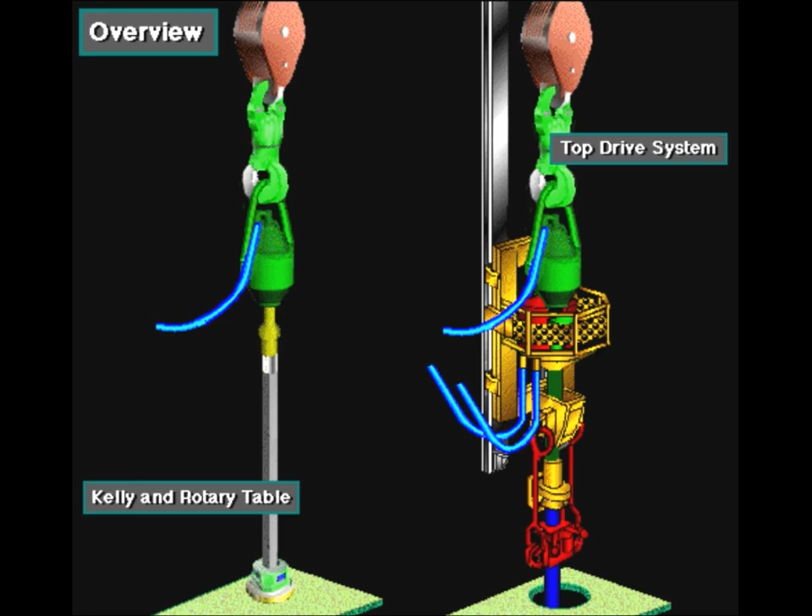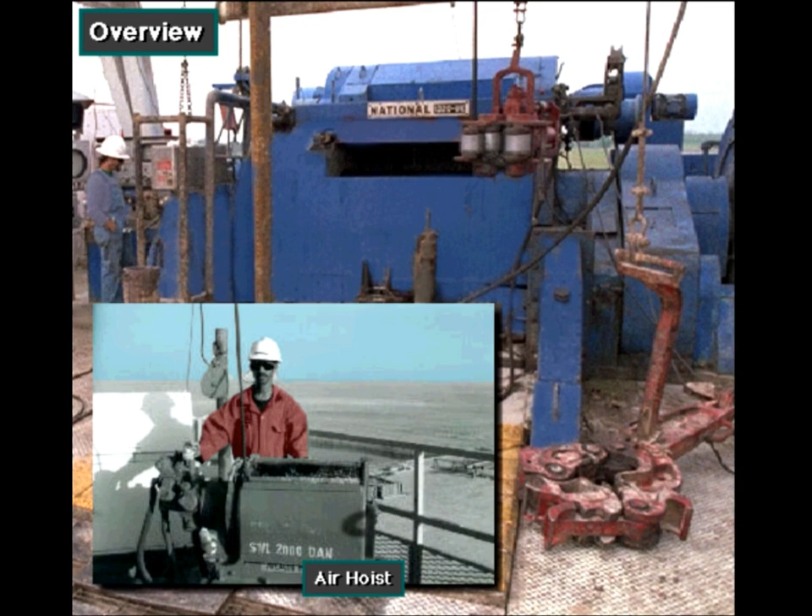Crew members can make connections either by using a Kelly and a rotary table system or a top drive unit. Handling pipe, tripping it in and out of the hole, connecting joints together, and moving it around the rig floor requires a lot of equipment. Included in this equipment are the elevator, slips, tongs, power tongs, spinning wrenches, catheads, Kelly spinner, iron roughneck, rat hole, mouse hole, and air hoist. Much of this equipment is controlled at the driller's console.

Transferring pipe from the deck to the rig floor may also involve special handling equipment. Notice that the Kelly is drilled down. That is, the rig can drill no deeper without adding a joint of pipe.

Here's the sequence to make a connection with a Kelly and rotary table system. The driller picks up the Kelly with the hoisting system, and the floor crew sets the slips to suspend the drill string in the hole.

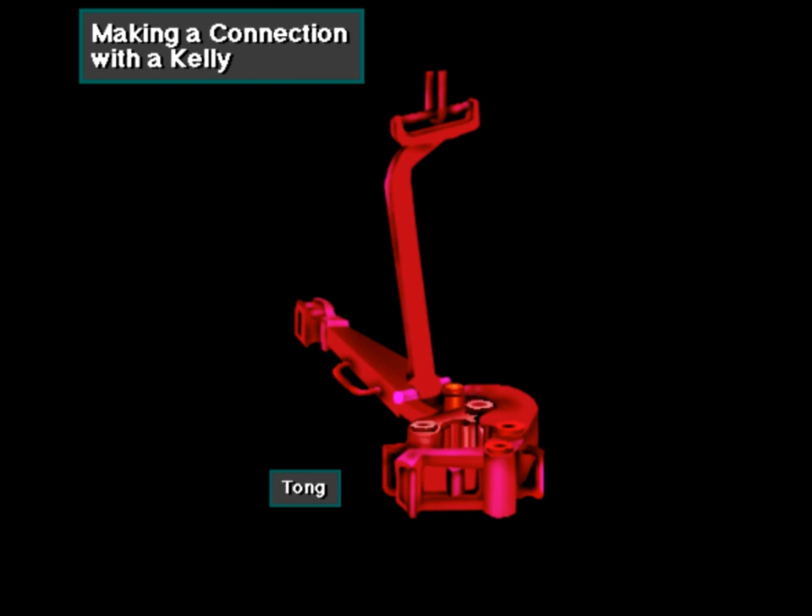Using large wrenches, called tongs, the crew loosens or breaks out the Kelly from the drill string. They latch one set of tongs, called the backup tongs, around the drill pipe to keep the pipe from turning when they apply breakout torque with the second set of tongs, called the lead tongs.

The driller actuates the breakout cathead, which is an automatic winch on the drawworks. The breakout cathead pulls a line attached to the lead tongs and loosens the connection. With the connection loosened, the driller spins out the drill pipe from the Kelly, usually by slowly turning the rotary table. The backup tongs, latched onto the Kelly's saver sub, keep the Kelly from turning as the pipe spins out.

The crew then moves the Kelly over to the new joint of pipe placed in the mouse hole, a lined opening in the rig floor that holds the joint to be added. They stab the Kelly into the new joint.

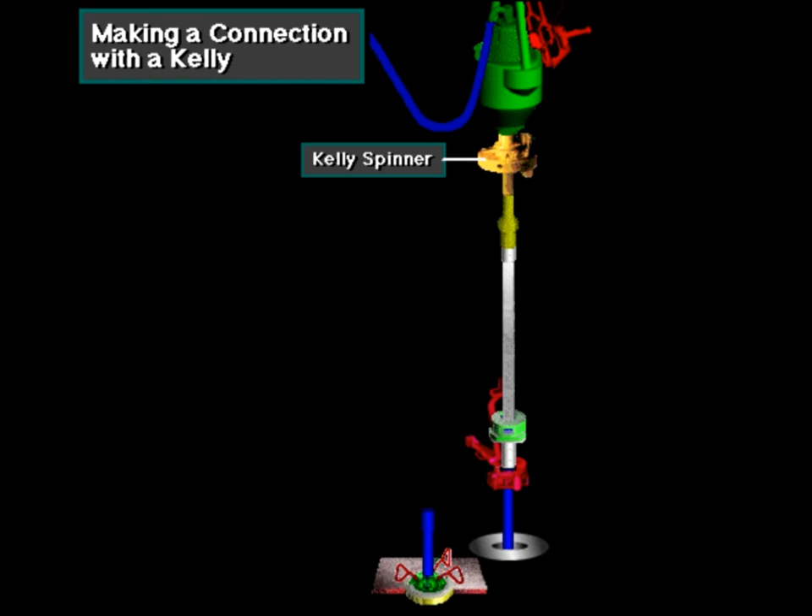They latch the backup tongs around the tool joint of the pipe joint in the mouse hole. The backup tongs keep the joint from turning as the driller spins up the Kelly into the joint using the Kelly spinner. The Kelly spinner is a pneumatic or hydraulic device mounted near the top of the Kelly.

To make up the Kelly onto the drill pipe to final tightness, the crew latches the lead tongs around the Kelly while holding the backup tongs on the pipe's tool joint box. The driller then actuates the makeup cathead on the drawworks.

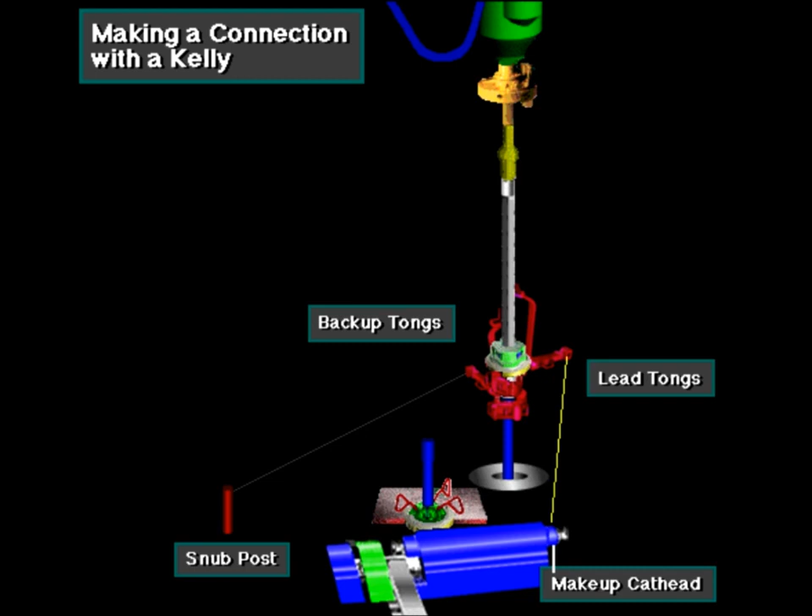The makeup cathead pulls a chain attached to the lead tongs and tightens the Kelly onto the drill pipe joint. The driller, using the hoisting system, picks up the Kelly and new drill pipe joint out of the mouse hole, and the crew guides it to the drill pipe joint hanging in the rotary table.

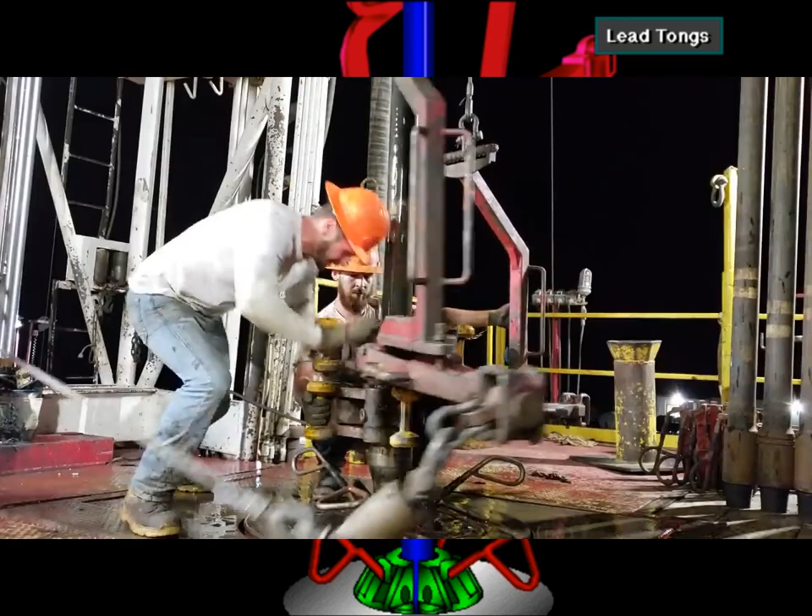The crew stabs the new joint into the suspended joint, and the driller actuates the Kelly spinner to spin up the new joint. Once spun up, the crew latches the backup and lead tongs around the joints to make them up to final tightness. With the joints made up, the driller picks up the Kelly and drill string.

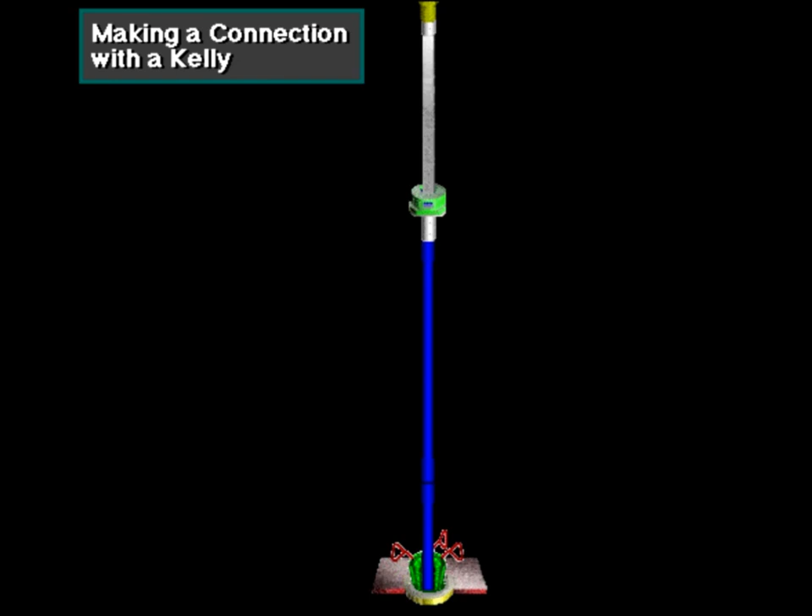The crew pulls the slips, and the driller lowers the Kelly and mates the Kelly drive bushing with the master bushing. Drilling then continues.

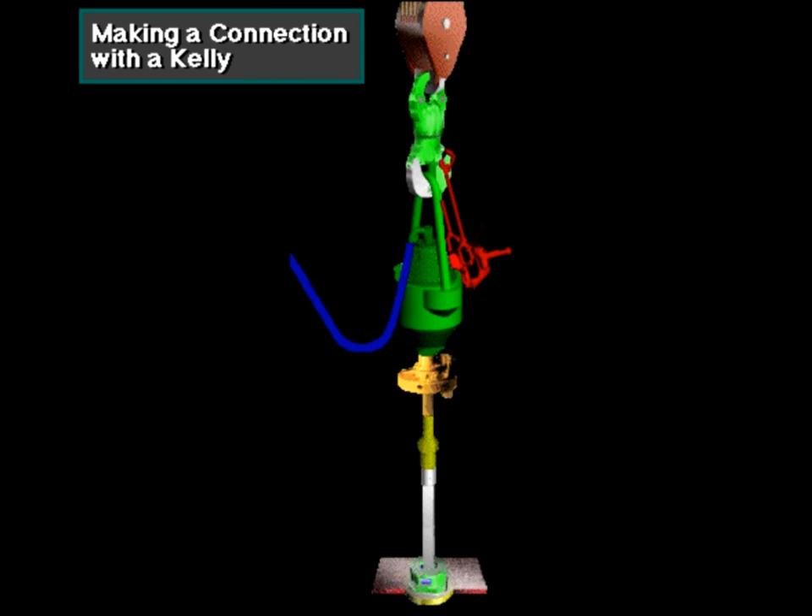Here's how to make a connection using a top drive. After drilling down the stand, the crew sets the slips. The driller stops circulation, and the crew breaks out the saver sub from the drill pipe using the torque wrench in the top drive's pipe handler.

The driller then uses the top drive's drilling motor to unscrew the connection. The driller picks up the top drive, and a crew member opens the drill pipe elevators to allow it to pass over the box of the pipe, setting in the slips.

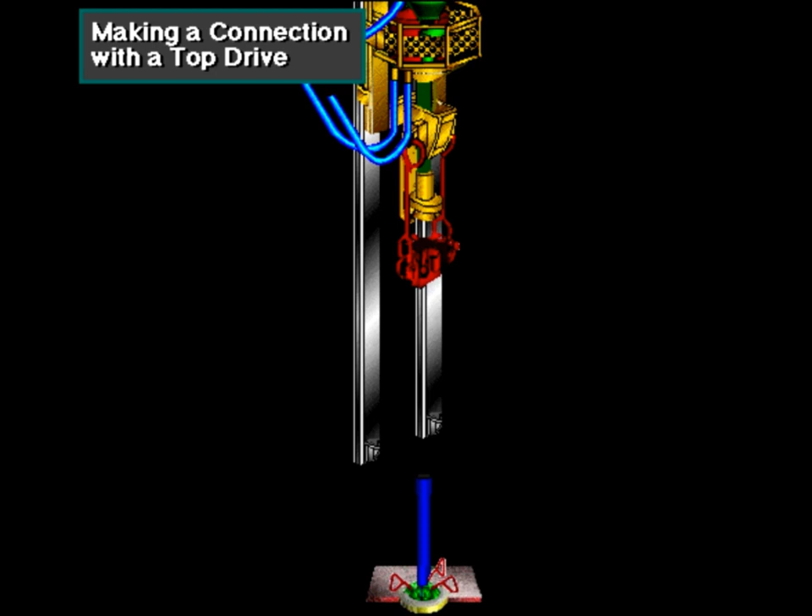The driller raises the top drive assembly to the monkey board.

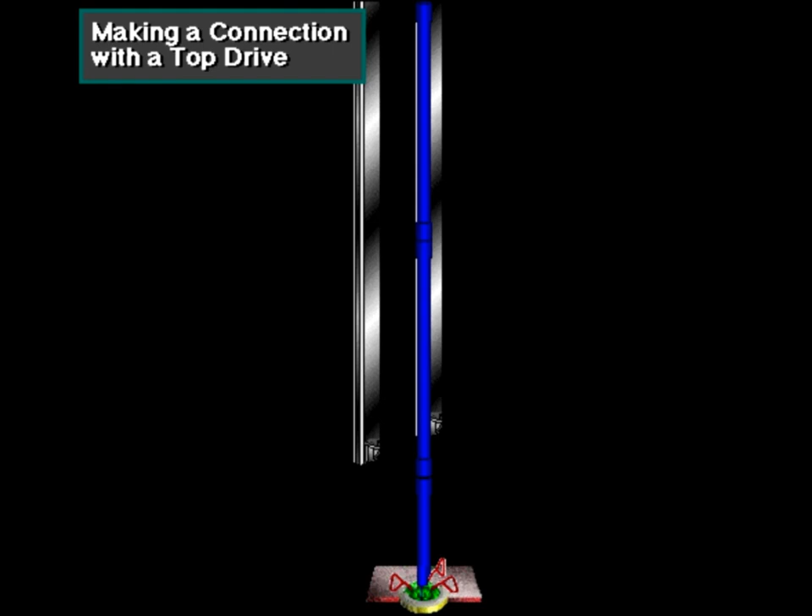The derrick man latches the triple drill pipe stand in the elevators. The elevators pick up the stand, and the floor crew stabs the bottom pin into the drill pipe box in the rotary table. The driller lowers the top drive to stab the saver sub into the box at the top of the stand.

Using the top drive's drilling motor, the driller spins up both the top connection and the lower connection at the rotary table. The rotary helpers use backup tongs to keep the connection stationary as the pipe spins. Finally, the driller begins circulation. The crew pulls the slips, and drilling resumes.

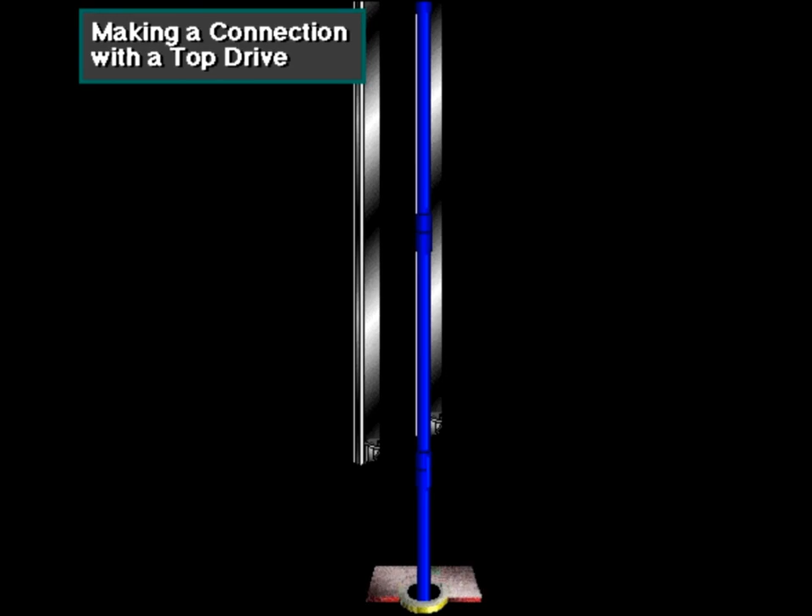Here's a crew on a rig with a Kelly and rotary table system, tripping pipe out of the hole. That is, the rotary helpers, the derrick man, and the driller are working together to pull the drill string from the hole, maybe to change the bit, or something similar.

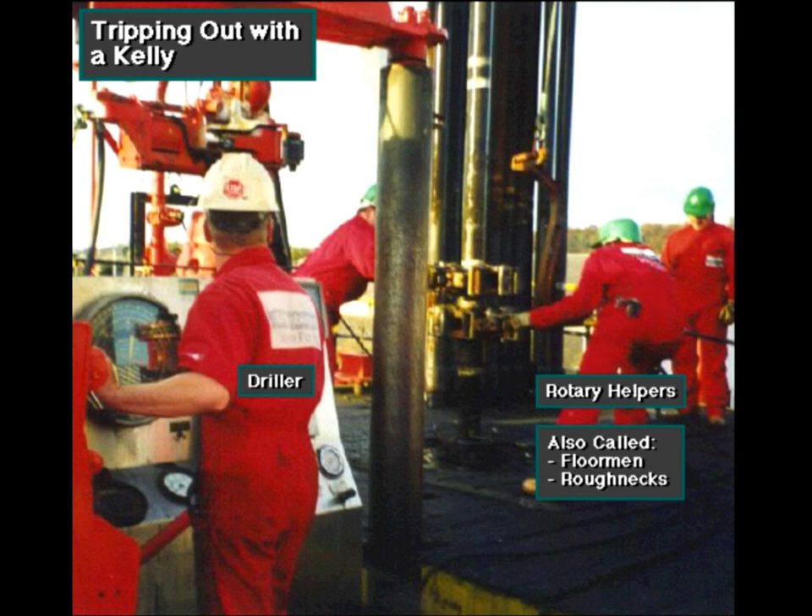Crew members latch the elevator around the joint of pipe hanging in the rotary table opening. The driller, using the hoisting system, then lifts the pipe from the hole. Usually, the driller lifts pipe until the third joint clears the rotary table opening. The floor hands then set the slips around the top of the fourth joint.

Using the tongs and a spinning wrench, the crew breaks out the three-joint stand from the drill string and sets it back in the mast.

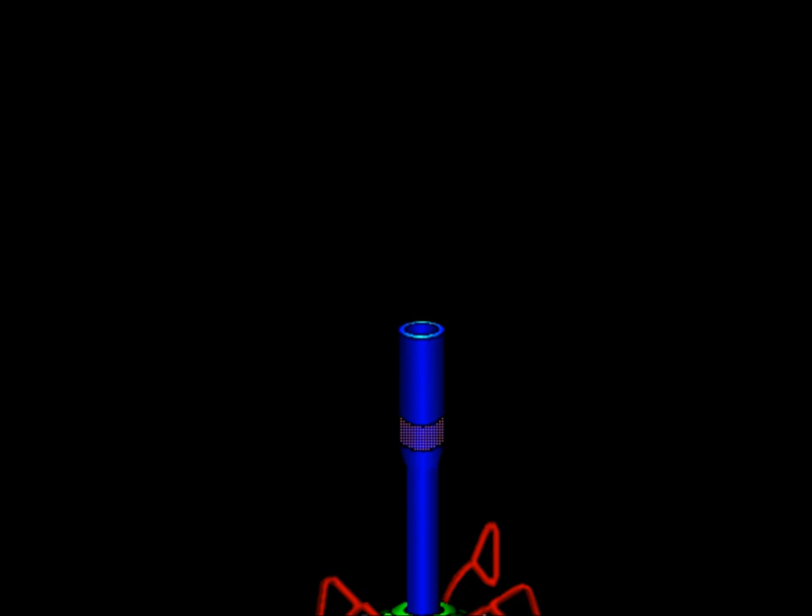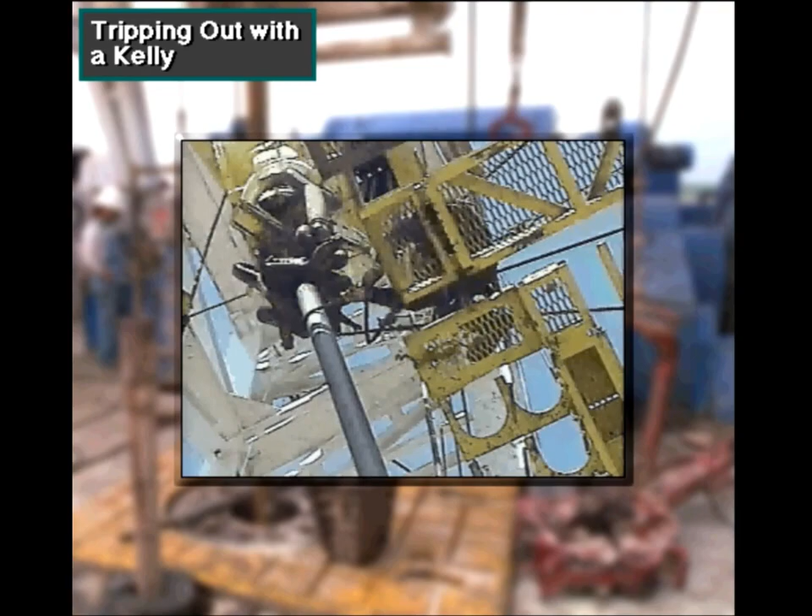Meanwhile, up in the mast, the derrickman handles the upper end of the three-joint stand. He places the top of the stand into a fingerboard, a series of projections near the derrickman's work platform called the monkey board.

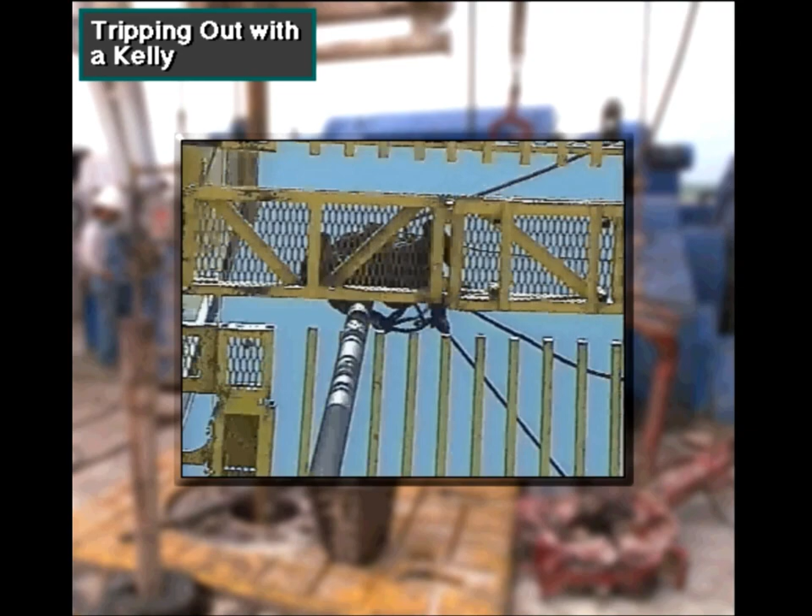The driller, rotary helpers, and derrick man repeat the process until all the drill string is out of the hole.

Here, the crew is tripping pipe back into the hole. The floor hands, derrick man, and the driller work together to get the drill string back into the hole. Tripping in is pretty much the opposite of tripping out.

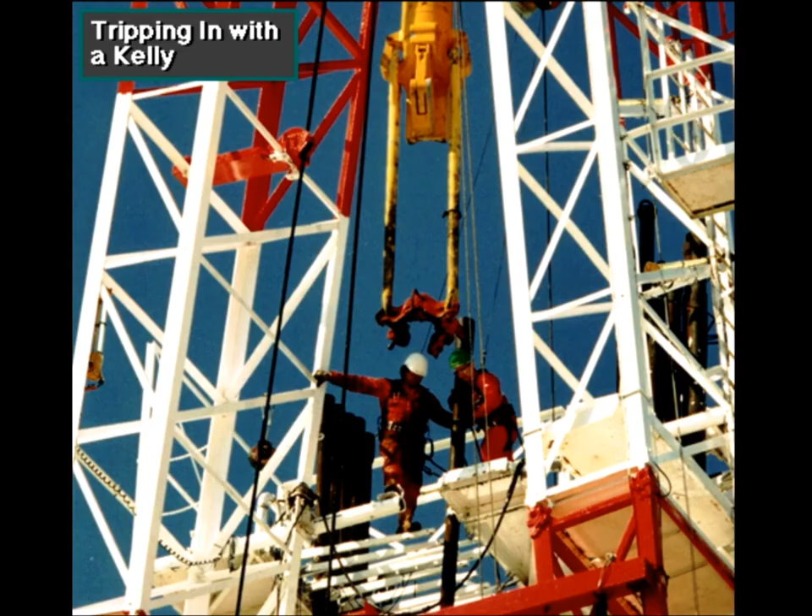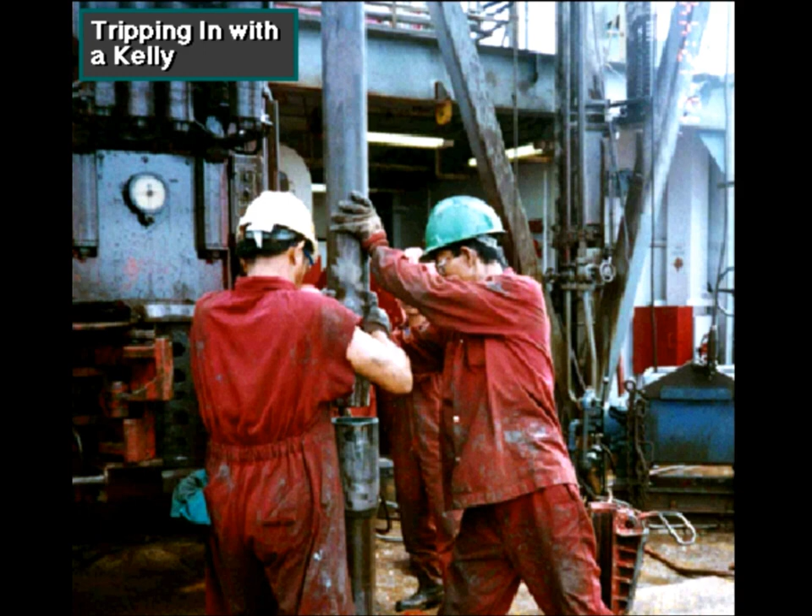The driller sends the elevator up to the monkey board, where the derrickman latches the elevator around the top of the stand. The driller then picks up the stand a little, and the rotary helper guides the lower end over to the string hanging in the rotary table opening. They stab the stand, using the spinning wrench to spin up the stand and make it up to final tightness with the tongs. The crew repeats this process until all the string is back in the hole.

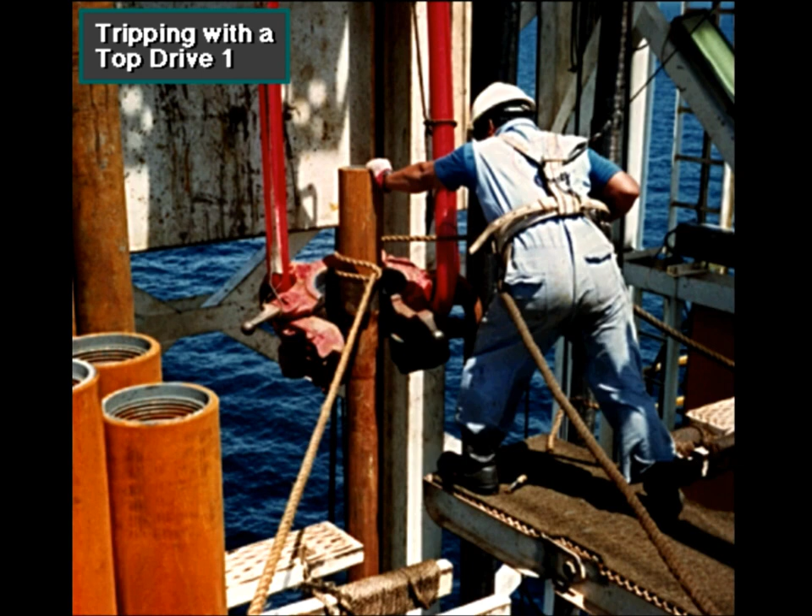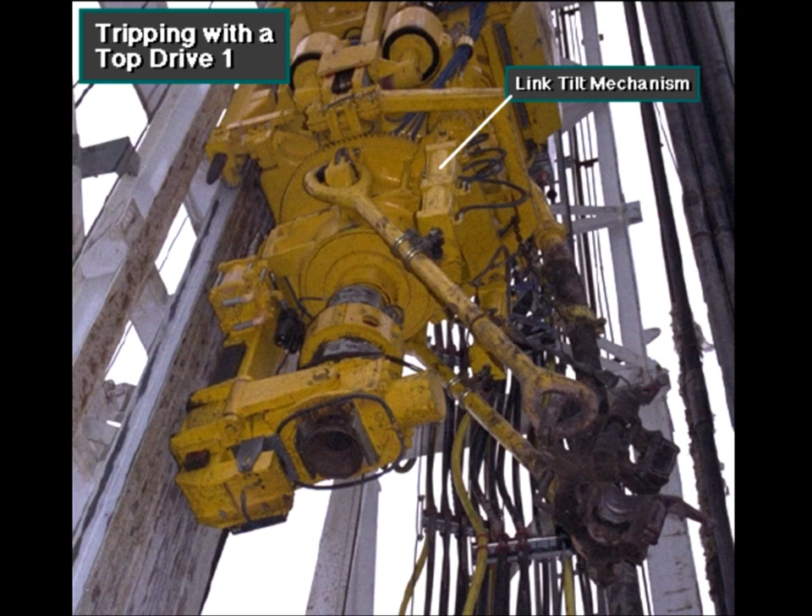When tripping with a top drive, crew members use the drive's elevator as much as they use a conventional elevator when tripping with a Kelly and rotary table rig. With a top drive, the driller can position the links and elevator close to the derrick man on the monkey board. The driller moves the links and elevator by actuating the remote-controlled link tilt mechanism on the top drive. Moving the links and elevator makes it easy for the derrick man to latch and unlatch the elevator around the drill pipe stand's top tool joint.

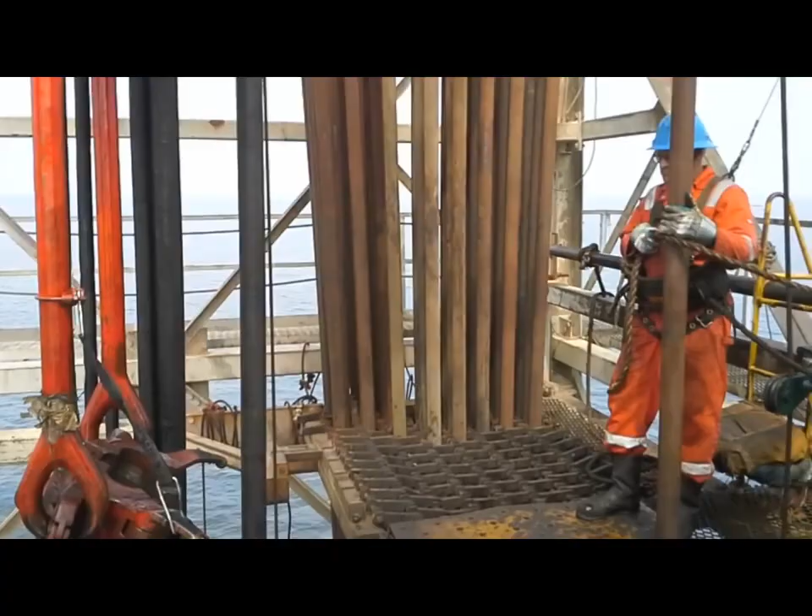The drilling crew can also position the elevator in any direction by unlocking the rotation lock and rotating the pipe handler assembly. Being able to position the pipe handler assembly in any direction enables the derrickman and rotary helpers to position the elevator where they need it to make a latch. The elevator returns to its original position when rotated by the drill string.

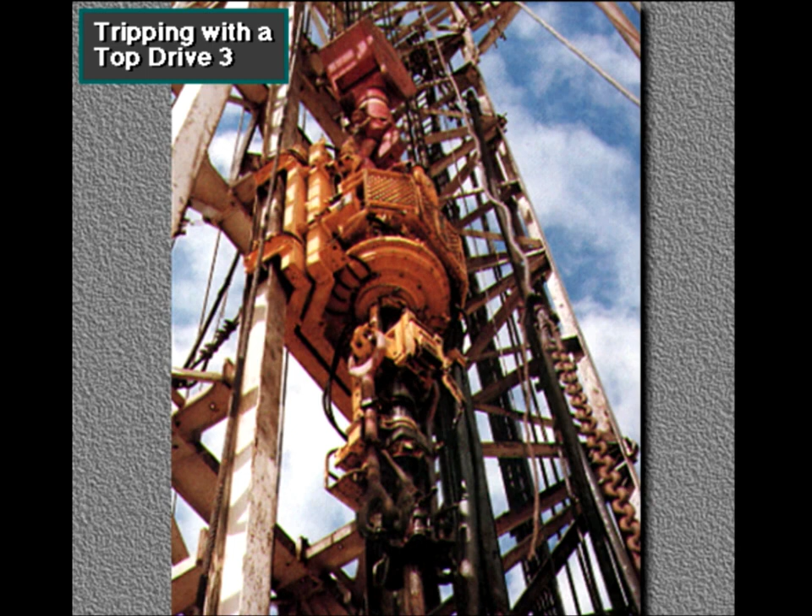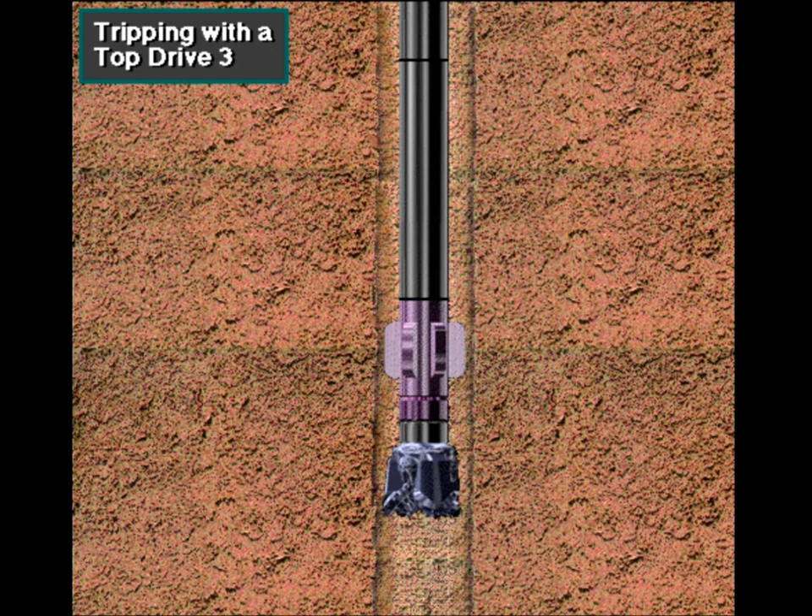One advantage of a top drive over a conventional Kelly system is its ability to ream or back ream at any position in the mast while tripping. The driller can rotate and move the string up and down through a tight section of hole. These actions can ream out the tight section of hole.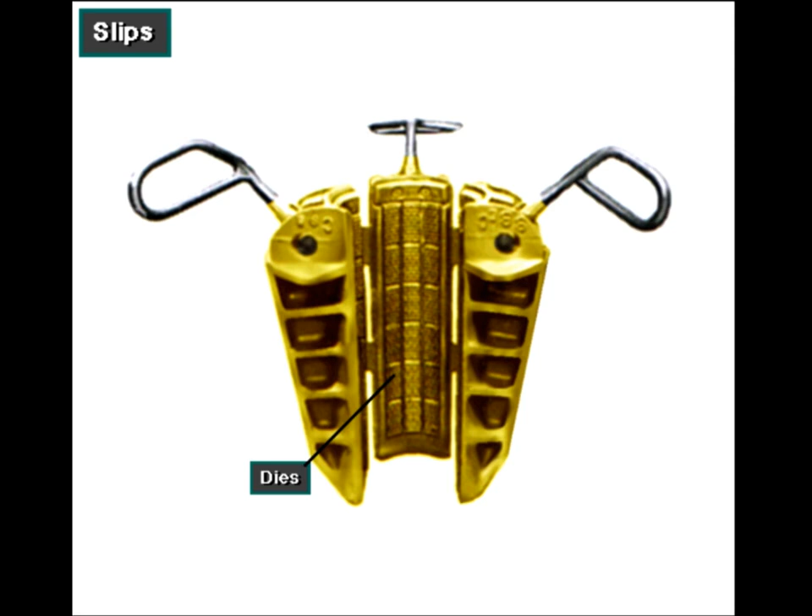Crew members use wedge-shaped gripping devices called slips to suspend the drill string in the hole. They fit around the top joint of pipe and wedge in the taper of the rotary table's opening. Slips have serrated inserts, or dies. The inserts grip the outside diameter of the suspended tubular. To set the slips, crew members place them around the pipe.

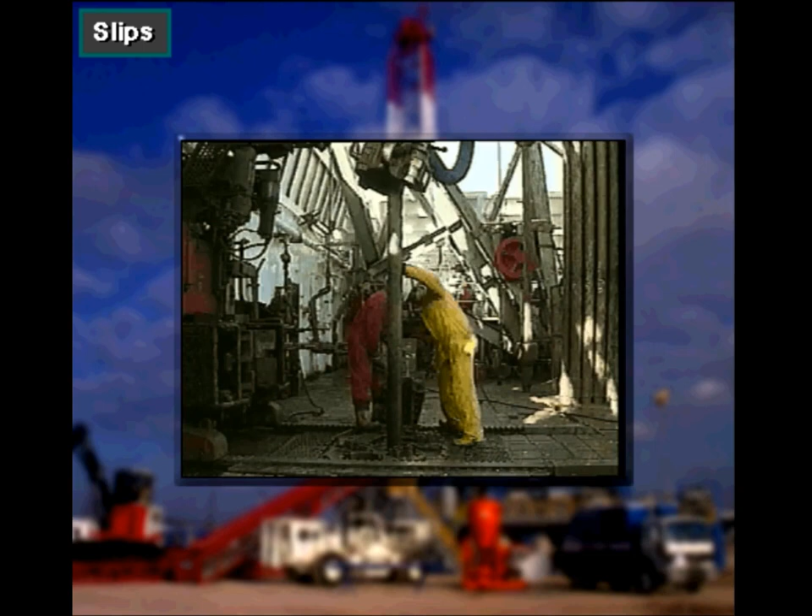The driller then slowly lowers the pipe until the slips can take up the load. The serrated inserts, or dies in the slips, firmly hold the pipe. To remove the slips, crew members grasp the slip handles. And, as the driller picks up the pipe, they lift them out of the rotary table opening and set them aside.

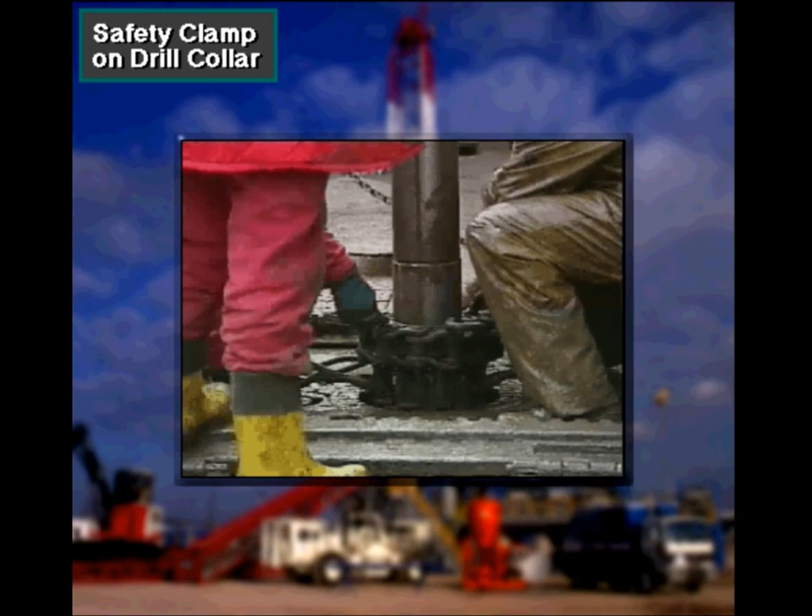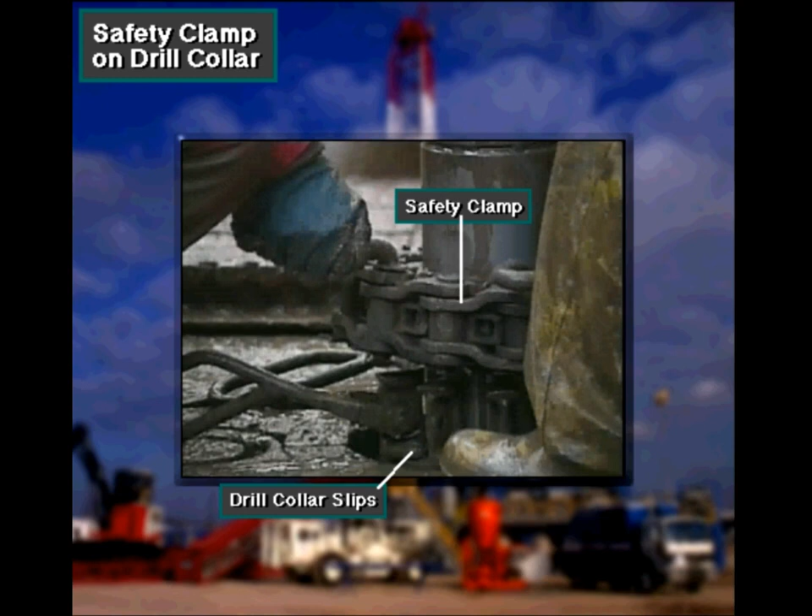When using drill collars and other tubulars that do not have an elevator shoulder, crew members install a safety clamp above the drill collar slips. If the gripping elements on the drill collar slips failed, the drill collar would slide down. Before the collars could slide all of the way out of the slips, however, the safety clamp would hold the collars against the top of the slips.

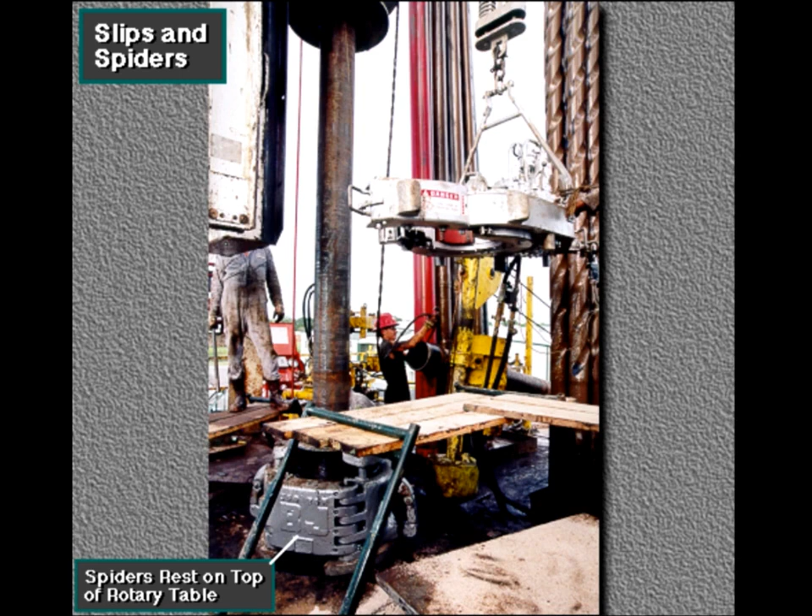Crew members use several types of slips and spiders. A spider, like slips, suspends pipe in the hole, but spiders do not fit inside the rotary table's opening. Instead, they rest on top of it. Spiders are used instead of slips when the rotary table's bushing size is not compatible with the tubulars being run.

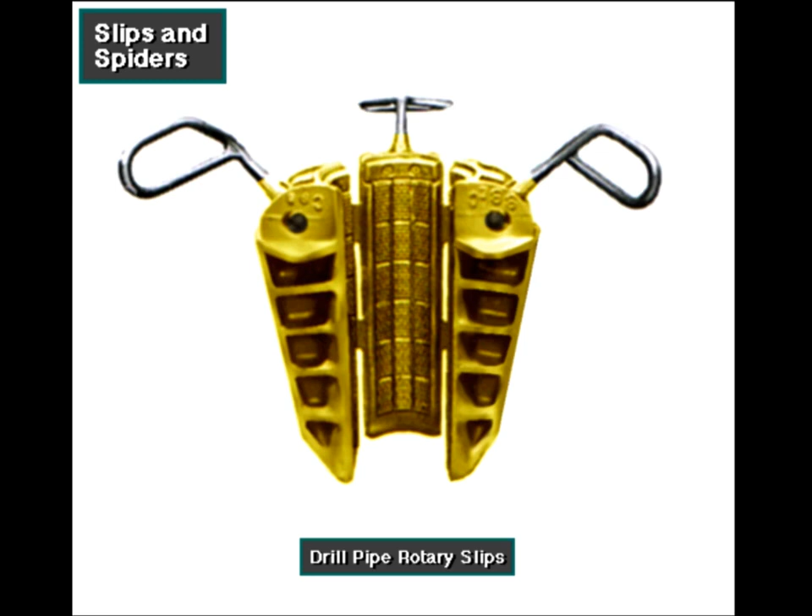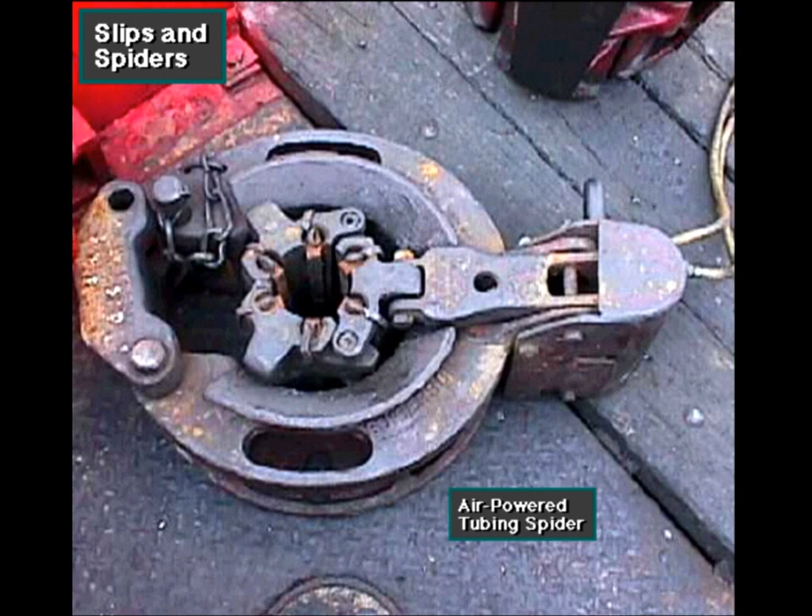Here you can see drill pipe rotary slips, drill collar slips, drill pipe coil spring power slips, an air-powered tubing spider, and a 750-ton air-controlled casing spider. Crew members use each one to hold the corresponding drill pipe, drill collars, casing, or tubing.

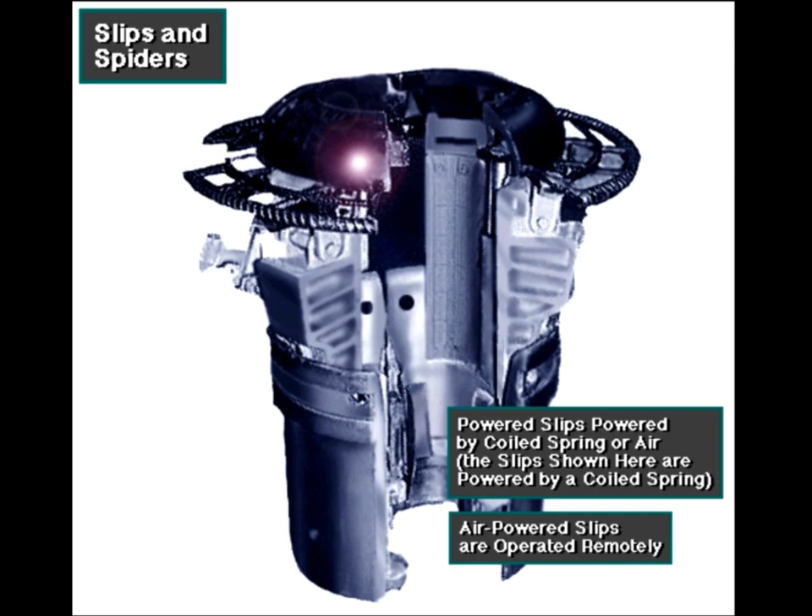Power slips are powered by a heavy-duty, high-strength coiled spring or by air. Instead of manually placing air-powered slips in the master bushing, crew members or the driller operate them by remote control.

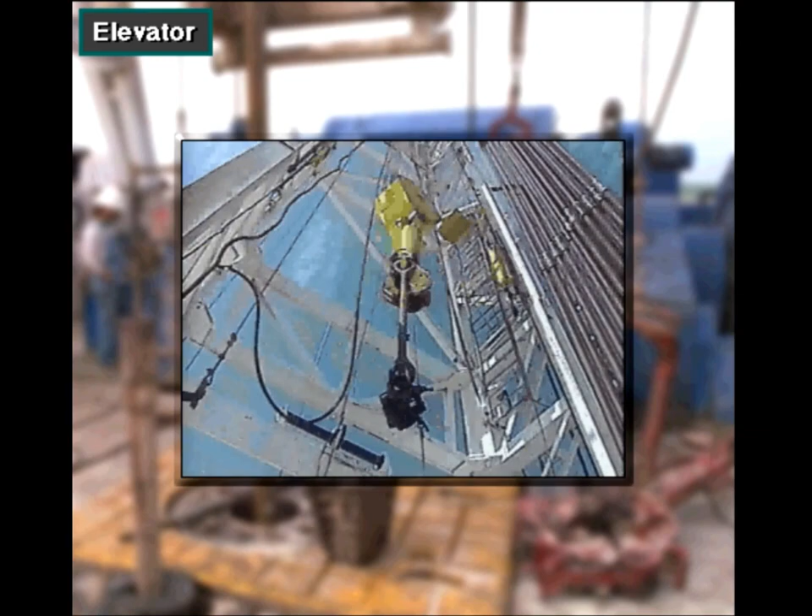Crew members latch the elevator around the top of pipe joints in the drill string. Once latched, the driller can raise and lower pipe in and out of the hole.

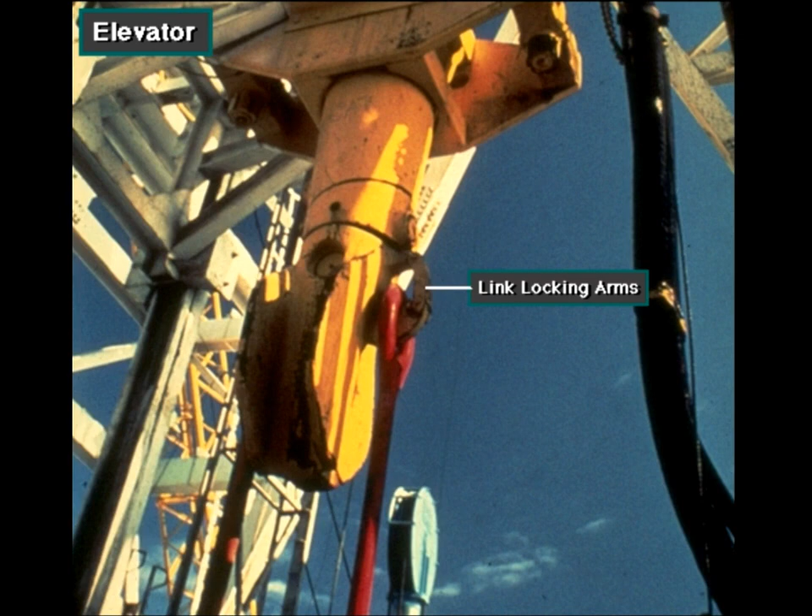Crew members attach the elevator to the hook with two forged high-grade steel rods called links or bales. One end of the links fits into the link ears on the hook. Link locking arms secure the links into the ears. Crew members then attach the elevator to the other end of the links.

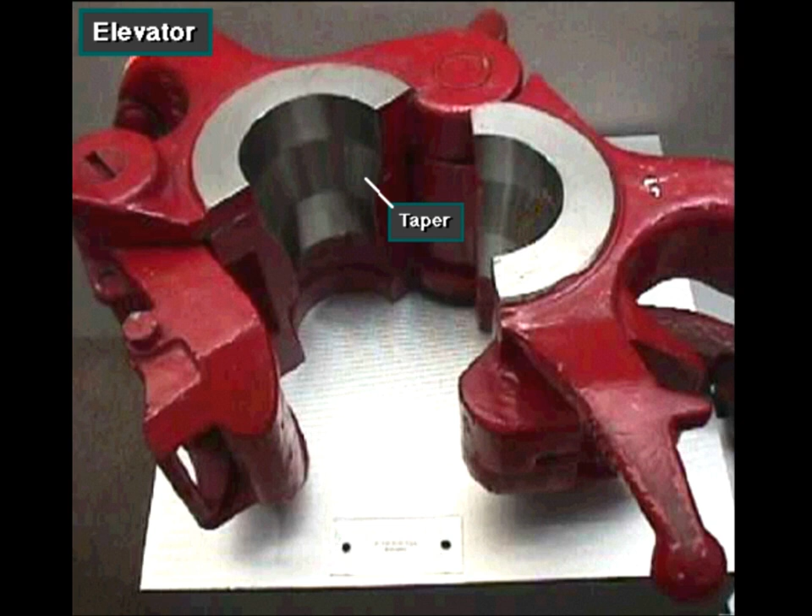Most elevators are hinged. Crew members open and close them by operating the latch with two handles on each side. Notice that this elevator has a tapered seat. This taper matches the taper on the tool joint of a length of drill pipe. When properly latched, the tool joint taper rests in the elevator taper and makes a firm, positive grip without damaging the drill pipe.

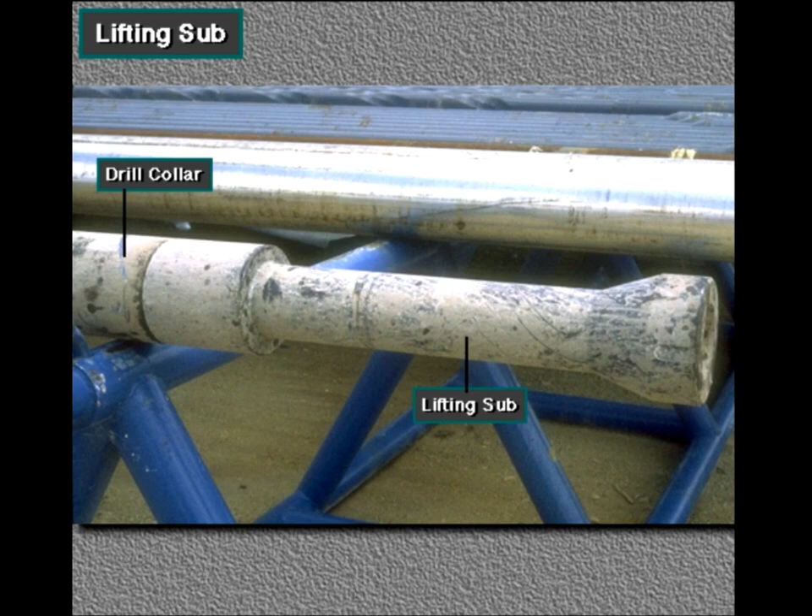On drill string members that do not have an elevator shoulder, crew members make up a lifting sub into the end of the joint. For instance, this drill collar does not have a shoulder. It is slick, so the crew made up the lifting sub. They latch the elevator onto the taper on the lifting sub to raise or lower drill collars into and out of the hole.

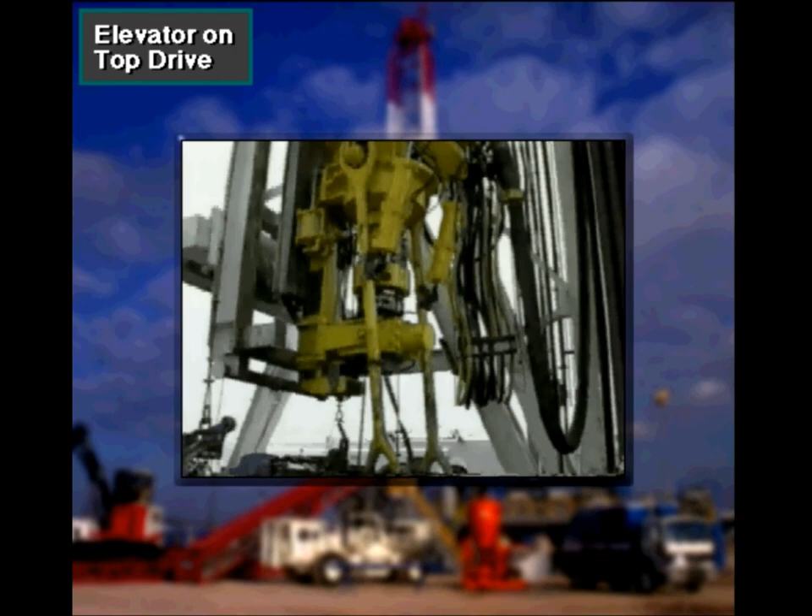On a top drive, the links holding the elevator have an air-operated or pneumatic tilt mechanism. The driller activates the tilt mechanism when the pipe is being pulled from the hole. When the top of the drill string reaches the derrickman's position at the monkey board, the driller can tilt the top of the stand of pipe toward the derrickman.

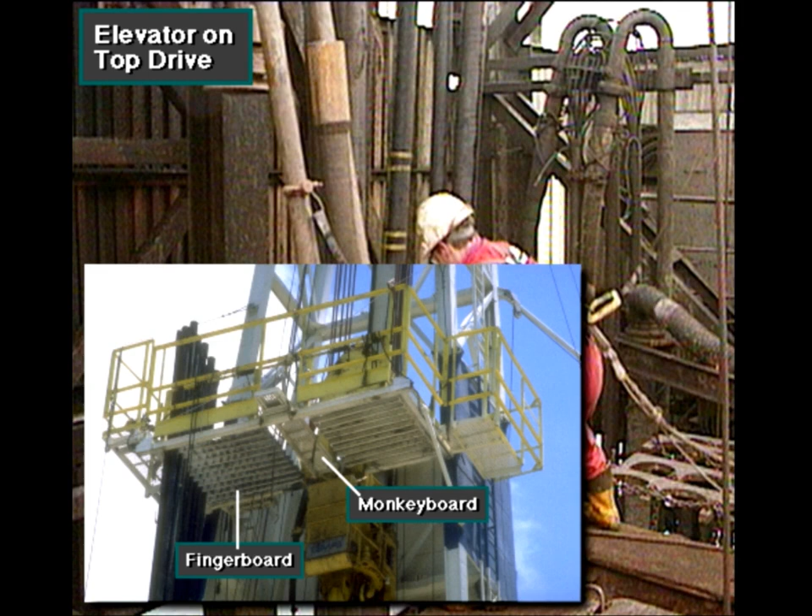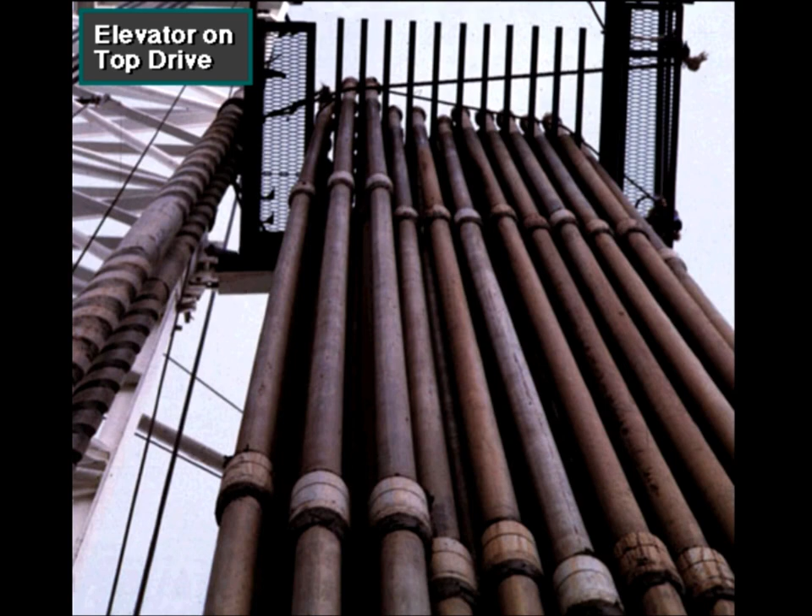The derrickman can then unlatch the elevator and set the stand back in the fingerboard. The fingerboard is a rack that supports the top of the stands of pipe being stacked in the mast or derrick.

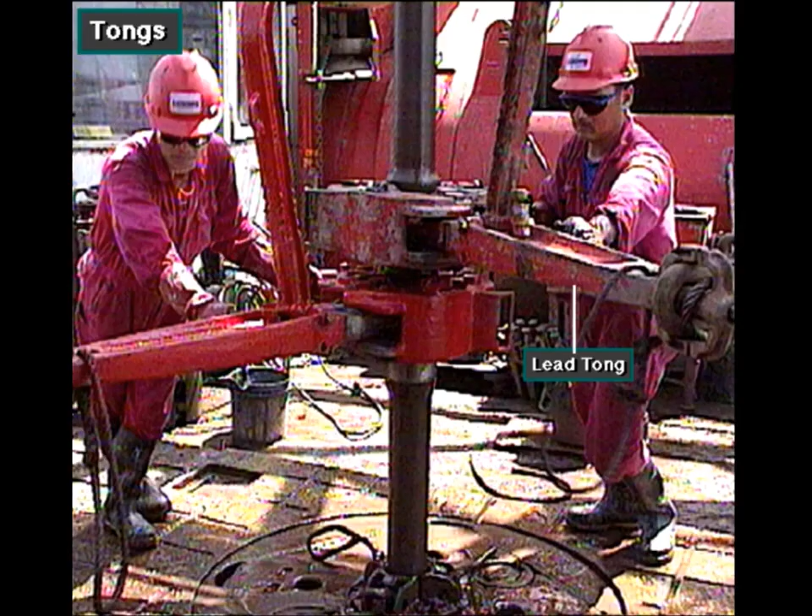Tongs are large wrenches that crew members use to make up and break out pipe. The crew uses two sets of tongs to make up and break out pipe. One set is the lead tongs. The lead tongs apply torque to tighten or loosen the connection. The other set is the backup tongs. The backup tongs keep the lower joint of pipe from turning as the lead tongs apply torque to the upper joint.

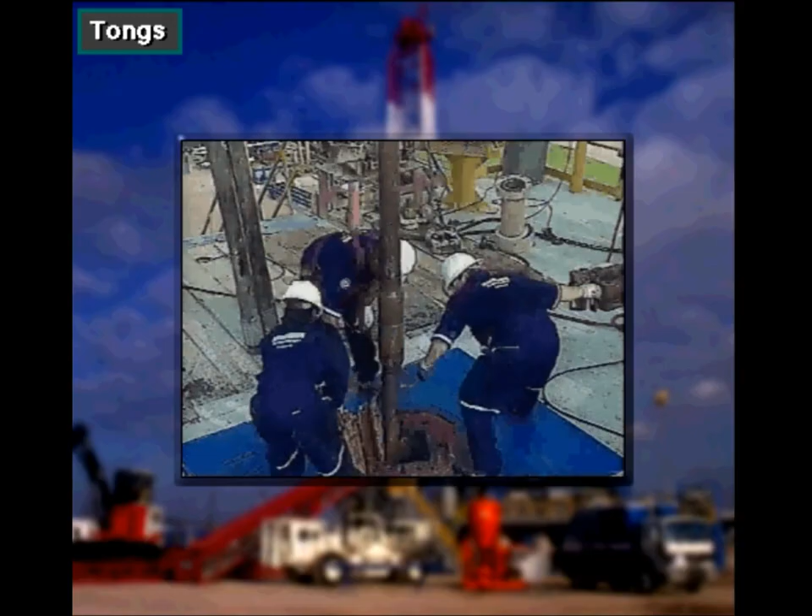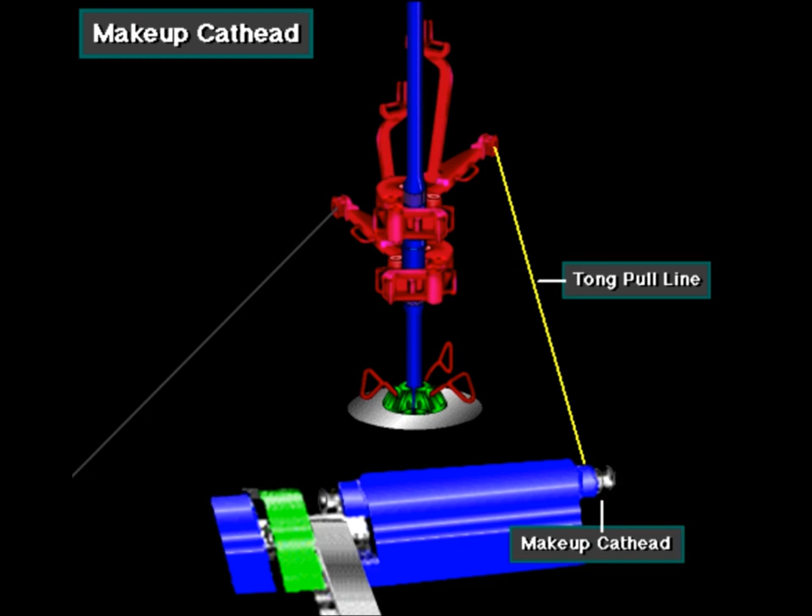Crew members use the tongs in conjunction with special catheads or winches on the drawworks. When making up drill pipe, the driller actuates the make-up cathead on the drawworks. The cathead takes in the tong pull line, a chain in this case, and exerts a strong pull on the tong arm. This pull causes the lead tongs to apply torque to the joint to make it tight.

When breaking out pipe, crew members use the breakout cathead on the drawworks. The breakout cathead takes in the tong pull line and exerts a strong force on the tong arm. This force breaks out the pipe connection.

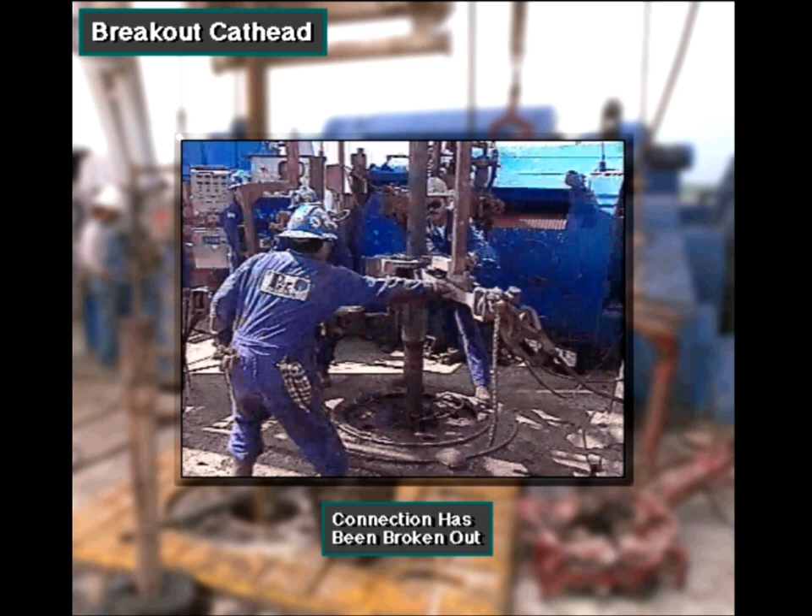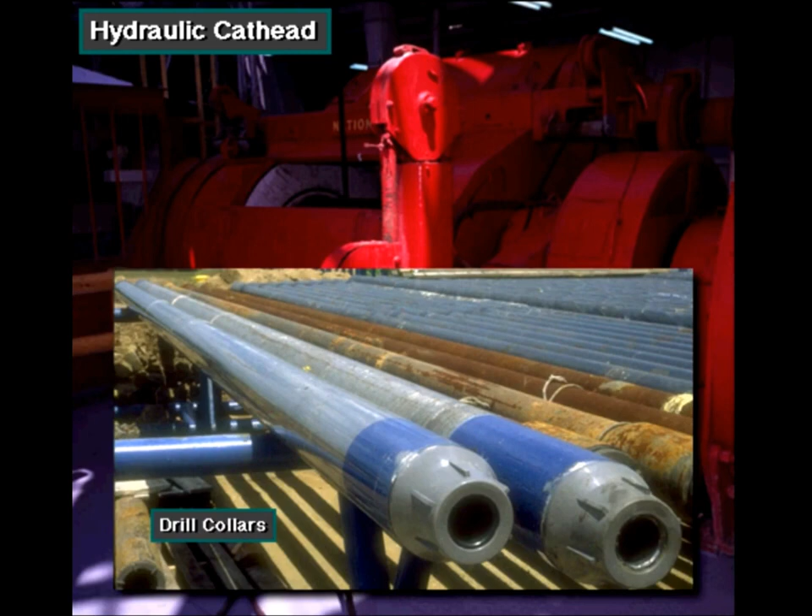This is a hydraulic cathead. It's an auxiliary torquing device. It helps crew members break out and make up very large drill collars. Very large collars require a lot of make-up torque, so much in fact that the breakout cathead's pulling force may not be strong enough. One solution is to use a hydraulic cathead with the rig tongs.

The hydraulic cathead includes a hydraulic cylinder housing and a wire assembly. It is controlled remotely by the driller from his position on the rig floor. This device produces a safe, powerful, and steady tong line pull to break high torque connections.

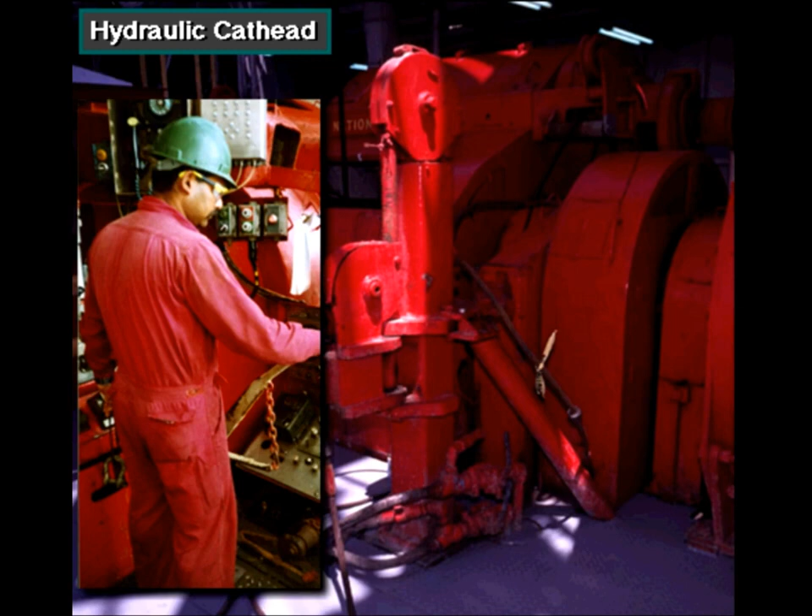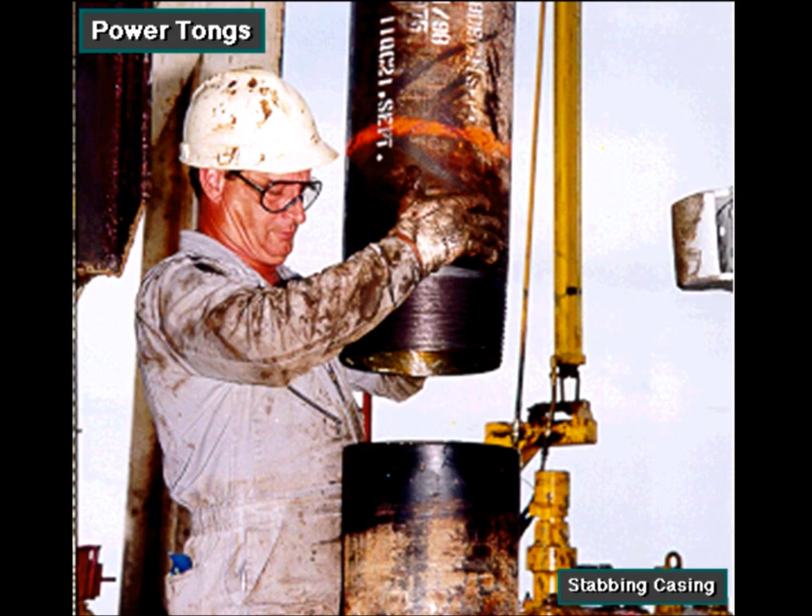Manufacturers make many types and sizes of power casing and tubing tongs. Crew members use them to connect casing and tubing couplings. Power tongs allow fast and uniform makeup and breakout of connections.

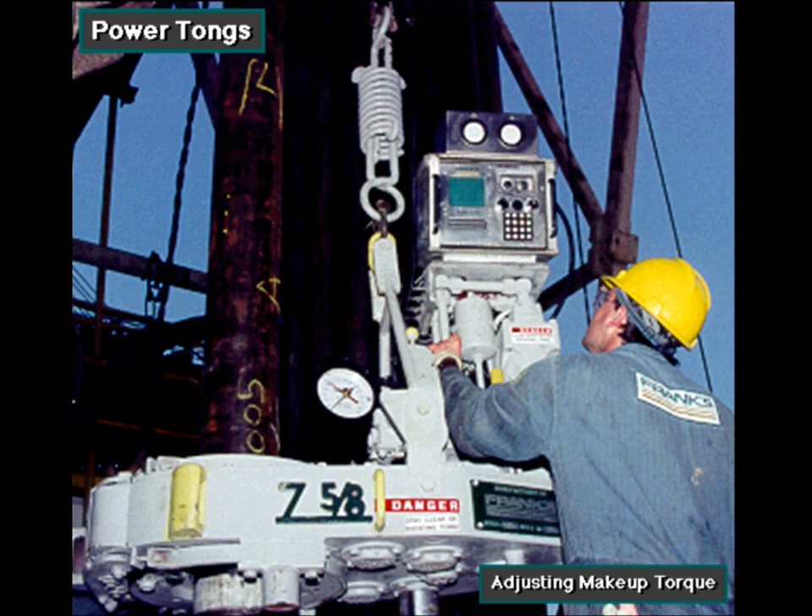The make-up torque can be preset by adjusting a built-in pressure relief valve.

Accompanying a rig's regular tongs is the spinning wrench, or pipe spinner. Crew members use it to spin up or spin out pipe connections. For example, once a connection is lubricated and stabbed, they place the spinning wrench on the upper joint and activate it. Rollers engage the pipe and turn it rapidly until shoulder meets shoulder. Then the crew latches the regular tongs to make up the joint to final tightness. They can also reverse the direction of the spinning wrench to spin out a joint that they loosened with the regular tongs.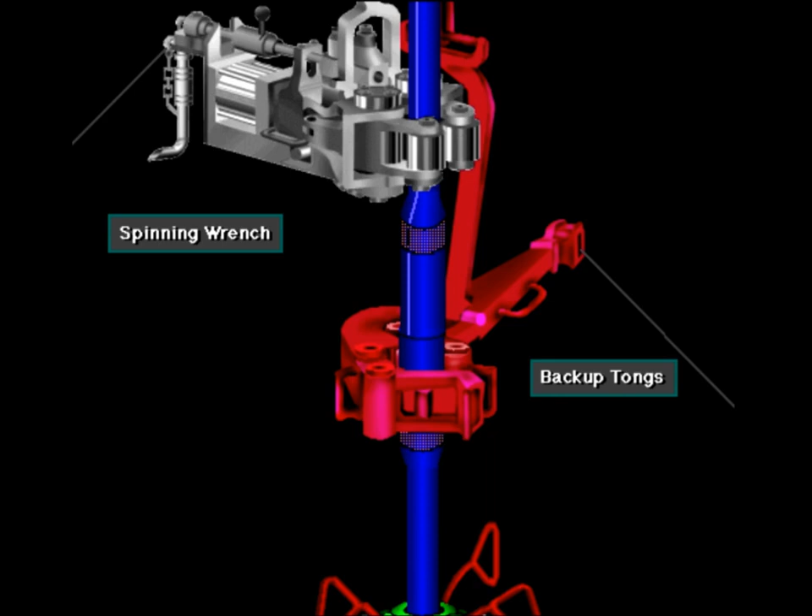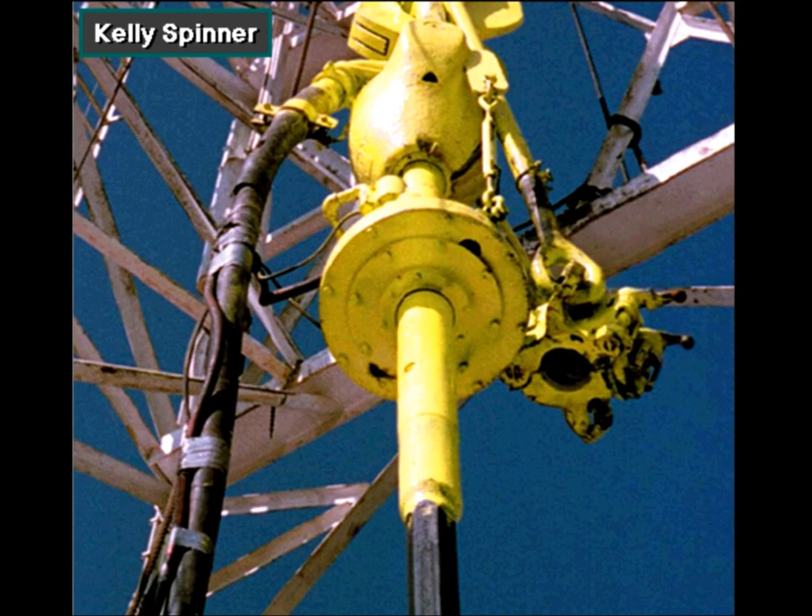To spin up or spin out the Kelly, most rigs have a Kelly spinner. It is hydraulically or pneumatically operated. When the driller activates it, the Kelly spinner rapidly spins up or spins out the Kelly from a joint of drill pipe. Crew members attach it to the Kelly below the swivel.

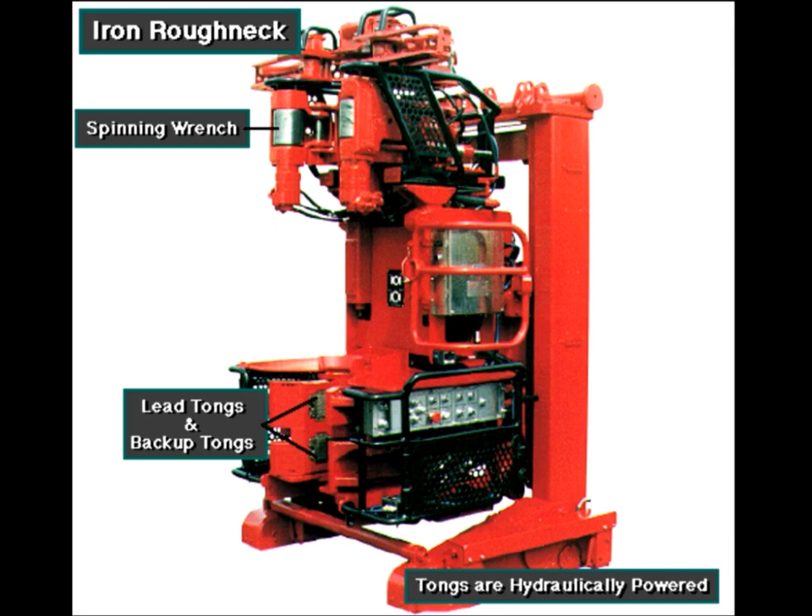Some rigs have this vertical pipe handling device. The manufacturer calls it an iron roughneck. It combines the lead tongs and backup tongs into a single package. The built-in tongs are hydraulically powered, self-contained torque wrenches. They allow the crew to make up and break out joints without using catheads on the drawworks. An iron roughneck mounts on the rig floor and rolls into place on tracks. It reduces the labor involved in making up and breaking out pipe. However, crew members have to maintain it carefully to ensure proper operation.

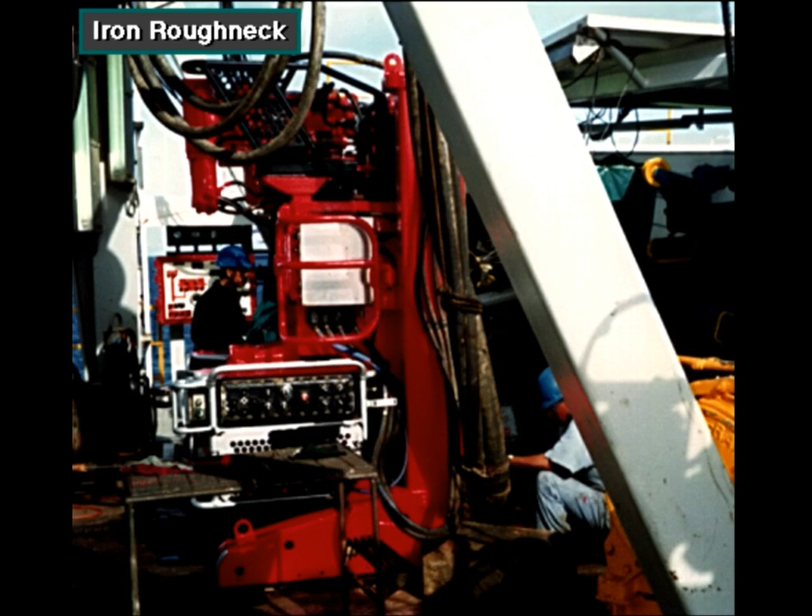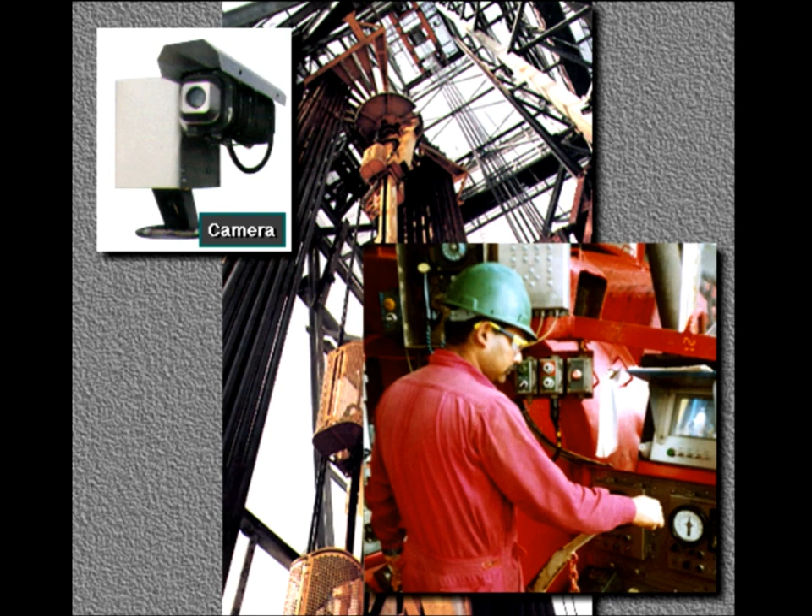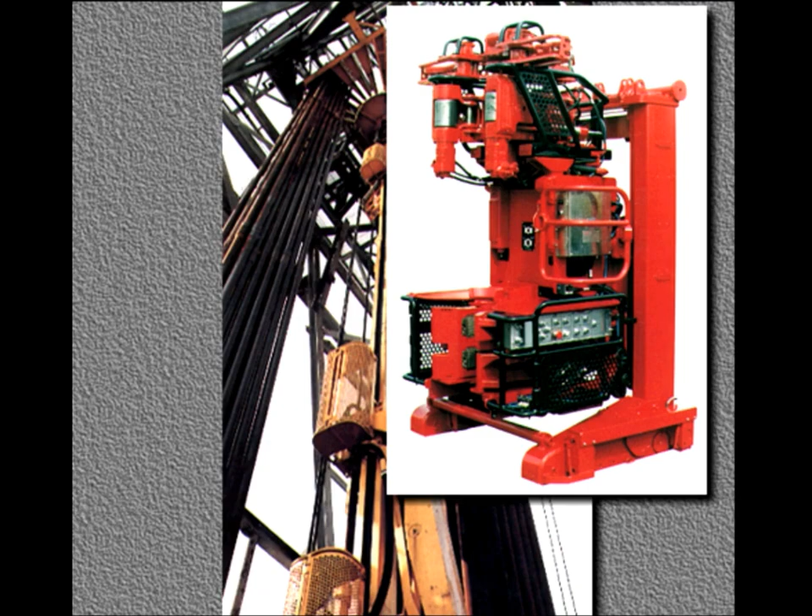Some rigs working in rough seas or harsh environments use an automated pipe racking system. The rig owner mounts the racking system on the rig floor and to the mast. The device racks pipe stands in the mast's fingerboard. The operator controls the pipe racker from a remote station and views the operation from a camera located directly above the fingerboard. The pipe racking system works in conjunction with the iron roughneck. Another type of pipe racking system, found on drill ships, racks the drill pipe stands in horizontal racks outside the mast or derrick.

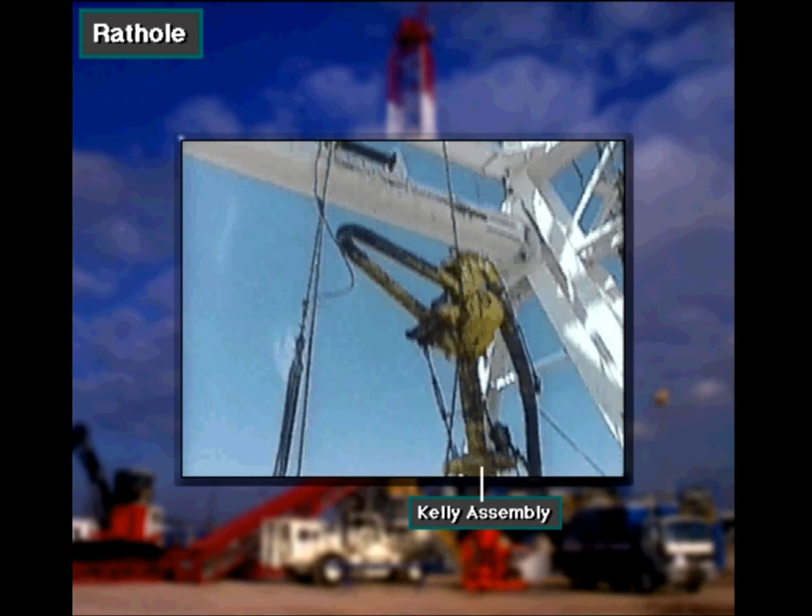Crew members place the Kelly assembly in the rat hole when they are ready to make a trip. The rat hole is made of large diameter pipe that extends below the rig floor, and also protrudes above the rig floor to make it easily accessible.

The mouse hole is a length of large diameter pipe that extends below the rig floor. The crew places a joint of drill pipe in the mouse hole in preparation for adding it to the drill string.

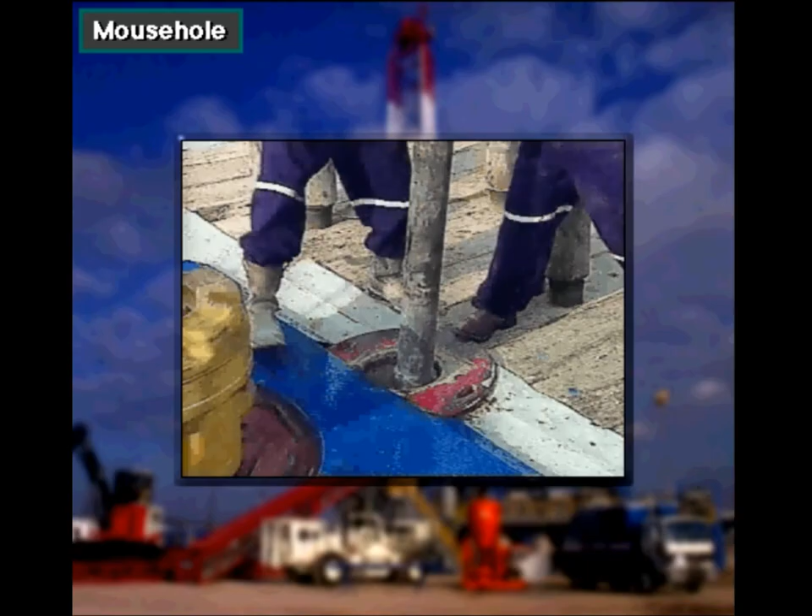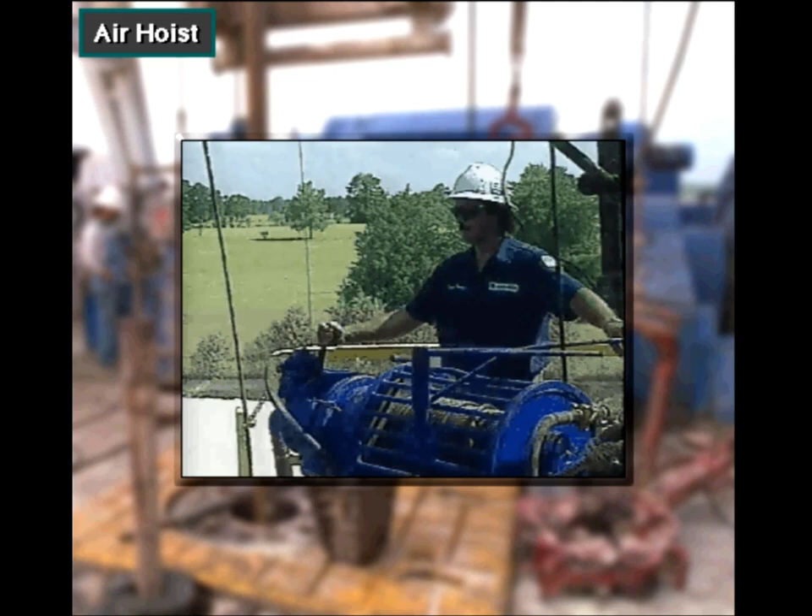Crew members use an air hoist to move pipe and other drilling equipment around the rig floor. An air hoist is an air-powered winch that contains a reel of wire rope. When a crew member actuates the hoist, it takes in rope to lift a piece of equipment. It also has a wire rope guide that the crew member uses to keep the line from winding unevenly on the reel. Usually, rigs have several air hoists placed around the rig floor.

Some rigs use an automatic pipe transfer system to pick up and lay down tubulars. The pipe transfer system also moves tubulars onto the pipe deck. The automatic pickup and laydown system, PLS, hoists tubulars from a V-door position to a vertical position. The PLS consists of the guide rail assembly, hydraulic lift arm with slew capability, carriage, winch, and control console. The system can pick up or lay down drill pipe, drill collars, or casing joints weighing up to 7,000 pounds, over 3,000 kilograms, and up to 20 inches or 500 millimeters in diameter.

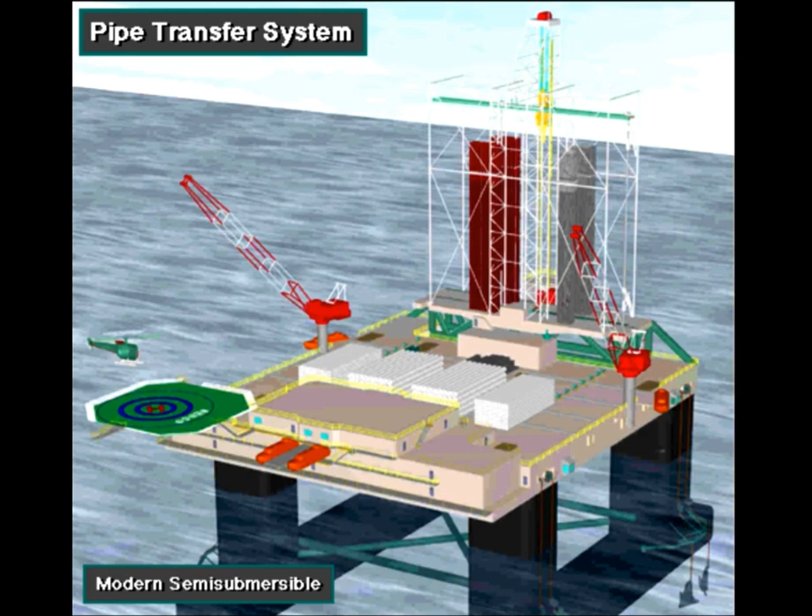The pipe deck machine, or PDM, has a hydraulically controlled mechanical arm. This arm moves tubulars between the pipe rack on deck and the drill floor. The PDM picks up the tubular from the pipe rack, moves perpendicularly on a floor track, and then lowers the tubular to a conveyor. The conveyor carries the pipe up to the V-door. There, the PLS picks up the tubular and moves it to the elevator for hoisting. Pipe transfer systems are used on jackups, semi-submersible, platform, and land rigs.

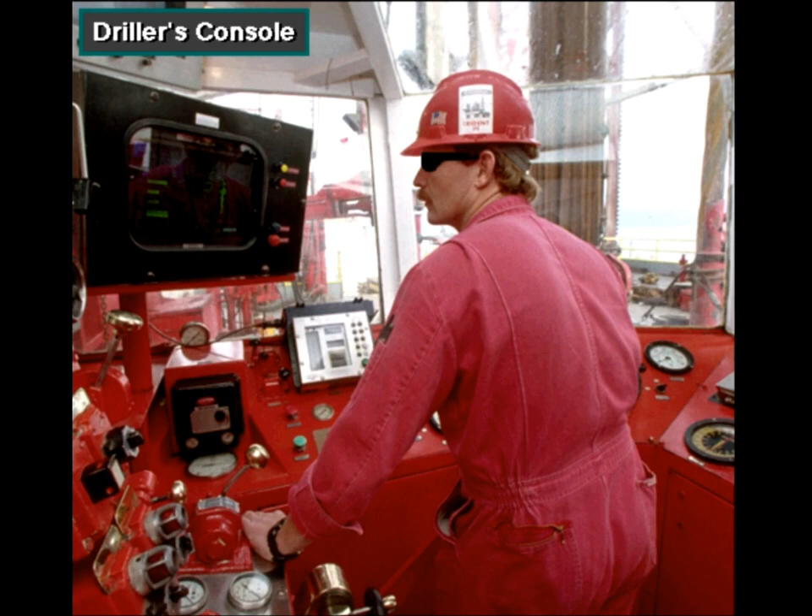The driller controls the rig's operations from this position at a console. The console is usually on the rig floor, either in the open next to the drawworks, or on the latest rigs in a control house on the floor.

One important gauge on the instrument panel is the weight indicator. It tells the driller the weight on the bit and the hook load. The hook load is the weight that is suspended from the traveling block and hook. Weight on bit is the portion of the bottom hole assembly weight acting on the bit.

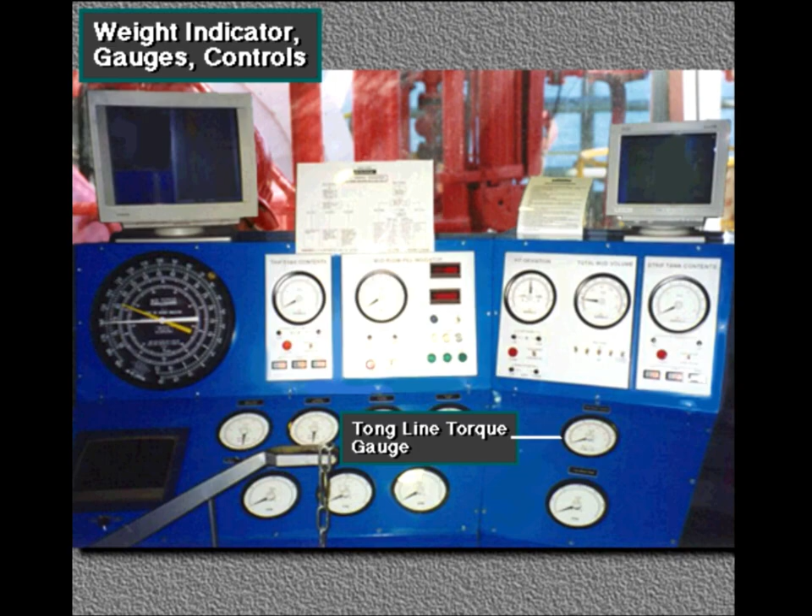Several gauges show the driller pump pressure, pump rate, rotary speed, rotary torque, and tong line torque. The driller's control panel allows the driller to operate the rotating, hoisting, and mud pump equipment on the rig.